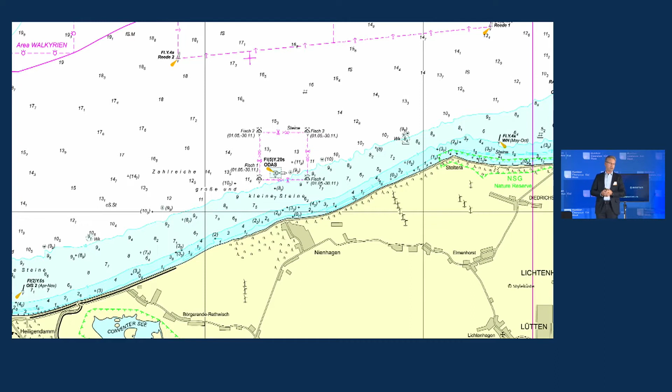And in the middle you'll see a small blue rectangle, where we have an artificial reef at the moment. And this artificial reef, this is not UXO, what you see here, all these things, this is concrete. These are concrete tetrapods and rings and a lot of things and natural stones. And within this area, a lot of research has been going on for about 20 years. And we have this in a cooperation with Fraunhofer, using this for some time now.

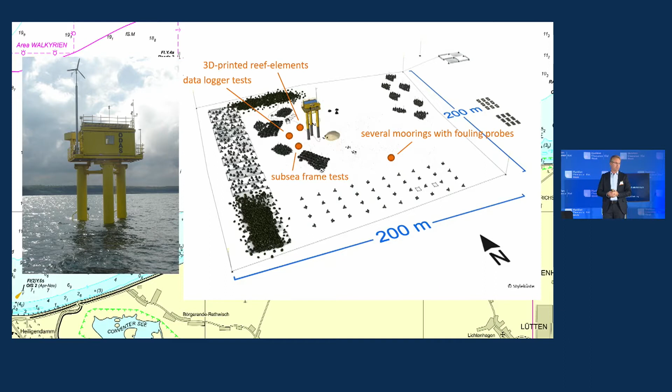And we also have some experiments running there about 3D printed reef elements, a data logger test, subsea frame tests, or several moorings for fouling probes and UV light aging tests. So there are already experiments running. And we also have communication and energy infrastructure. It's our platform, the yellow one on the left side, where you can come with your technology, your sensors or your probes and connect this to the platform. You can get all the data transferred to the land and also get energy from this platform. And so you have a lot of infrastructure for all the experiments you're planning to do.

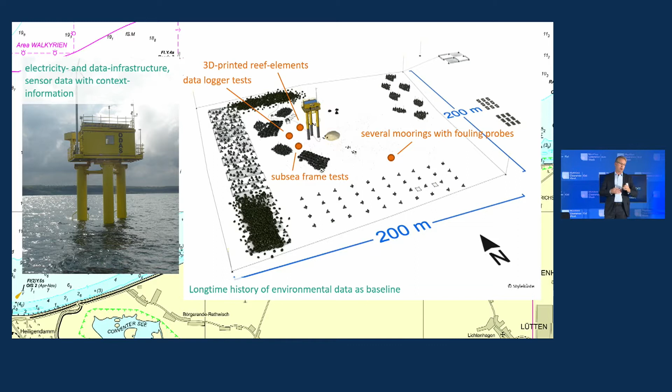And we have a very long time history of environmental data there. So for 20 years, this area has been monitored by biologists, and the seafloor and all the habitat is known. So if you're doing experiments there, we can support you with a long time series of information on this area.

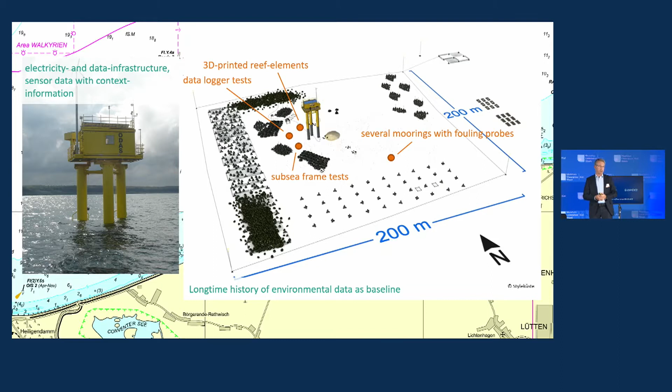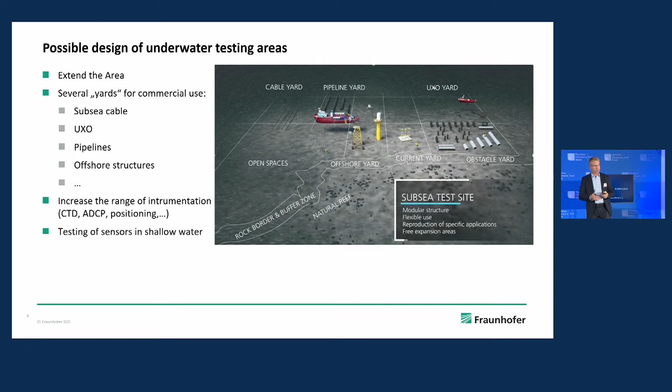And that's a running progress at the moment. We have a lot of funding for this. I say a lot means we have funding for this, and we now ask you to support us with your requirements. What do you like to have there in this yard?

We have a very good idea about what we are planning to do there, but within this context, Munition Clearance Week, we like to ask the industry, what do you need? What exactly do you need? So not a rough idea, UXO yard, but more exactly. So please come to me, tell me what you need, and we will build this there for you.

So the plan is to have the first usable UXO yard infrastructure in 2022, so it means next summer. It's very ambitious, but we have good partners, IKSR, who likes to start building this, but we need your support on what you really need.

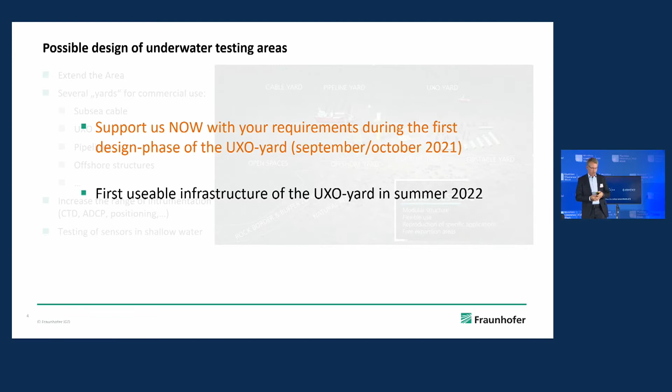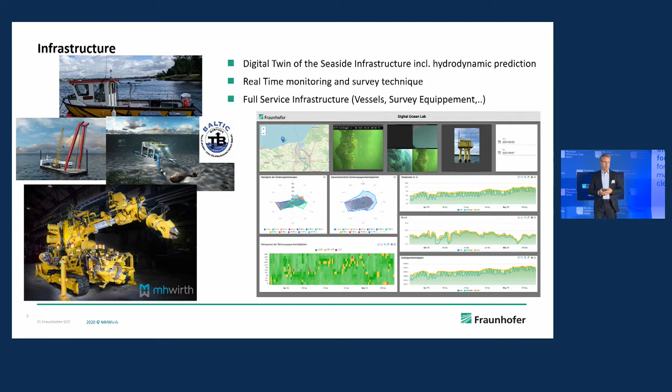It's a very interesting thing. Maybe Dieter Guldin will tell us about his experiences with a crawler. This is one technique that was developed for subsea mining once, but now we are thinking about using it for other purposes, maybe for UXO cleaning. This one is a really big one. It's about 16 tons at the moment, but this is just the model. The original one is bigger. And this is a really strong tool at the moment.

They have a lot of technique on it to scan the environment, to measure what happens with the object. You can change the chassis of this crawler. You can have different sensors on it. So we have an AI on it, so that you can control it and the object can really map its environment, and if there's an accident, it goes back. So it's an interesting tool. If you have questions, MH Wirth is willing to answer them. You can also ask me. I give you the contact, and it goes through us.

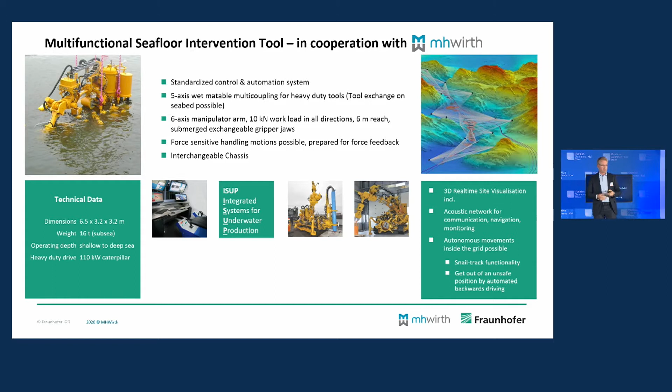So why Digital OceanLab? As we are an institute for computer graphics, the IGD is specialist in data analysis, artificial intelligence, and visualization of data. As you see on the right side above, if you have complex data from maybe a big dump site or from the sea ground, we have possibilities to visualize this. We have artificial intelligence to analyze the data, and this can help to improve the processes.

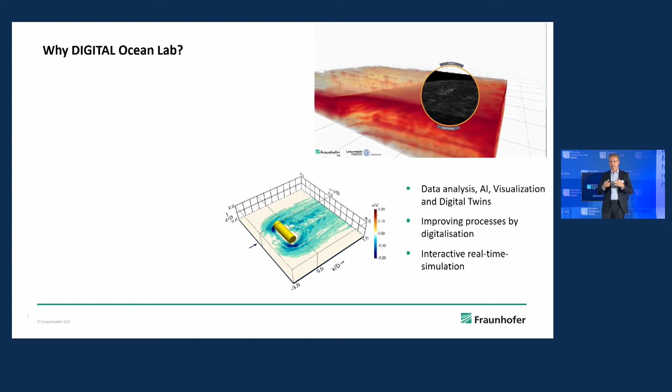And the other thing we are now planning to do, it's not existing yet, but will be the next thing in this development, will be a complete digital twin of the Digital OceanLab, including the fluid mechanic interaction, meaning a real-time interactive simulation of this environment. That's not coming today, not tomorrow, but that's for the next years.

And what already exists at the moment are some ideas for a dynamic room use. So we are using an AtoN system, it's an AIS, as you know from vessels. So you can mark the edges of our Digital OceanLab virtually via this AIS system. And as soon as we start construction, as we are doing in 2 weeks, we can change these buoys virtually without changing them physically. And when the construction is done, we just move it back.

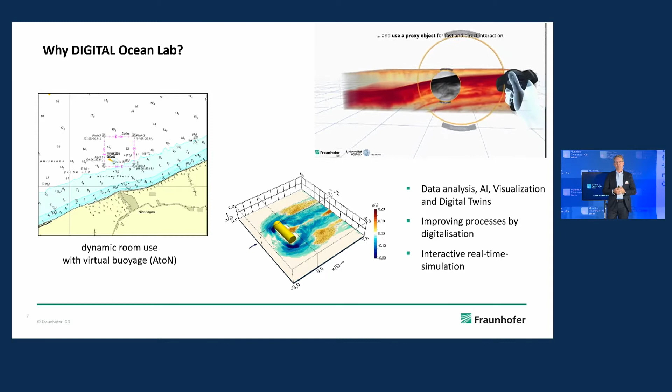That's not rocket science. But we are on a way with the authorities to make this possible, which also may be a good idea for further use of AUVs in a legal way. So that's just a first approach on this.

So I have a take-home message for you, because I have a lot of time, I was too fast. We are ready for action. So if you have any questions regarding tests, or if someone says, I do not know how to remove the UXO, we can test this here. No problem, just come to us, we can test it, we can do it. So there's no reason to wait. Contact us with your individual requirements. We're very happy to help you with our knowledge and the infrastructure.

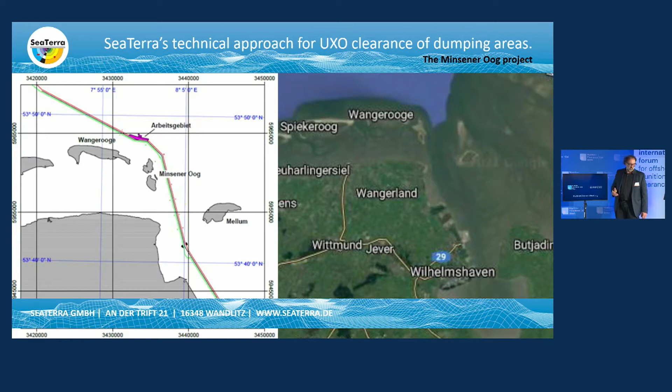But in this case it's slightly different, because there's the shipping route going out of Wilhelmshaven, and the shipping route has a curve - you see where it's marked Arbeitsgebiet. There's a slight curve, and the curve is actually too narrow. The problem is the big vessels from the JadeWeserPort need a wider curve to sail around there, and just in the curve there's a dumping area.

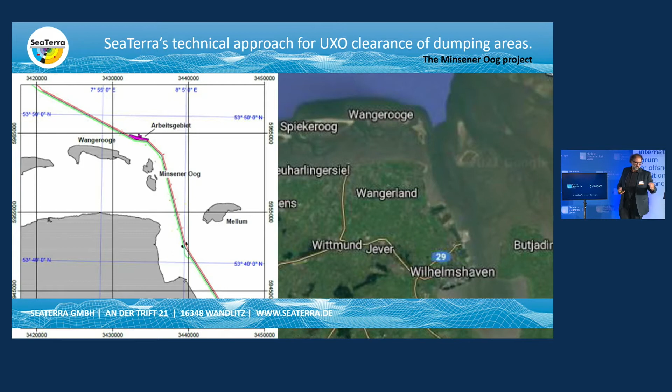It's a dumping area expected to have a lot of sea mines, ammunition, different types of mines. We are in front of Wilhelmshaven, in front of Wangerooge, and that's the area. Based on the magnetic data - and we also did an electromagnetic survey, it's not our data by the way, we already had that data, but we did another survey with a new electromagnetic system, and it corresponded quite well to each other. Based on this data set, we've been invited to come over for the clearance of 100 targets.

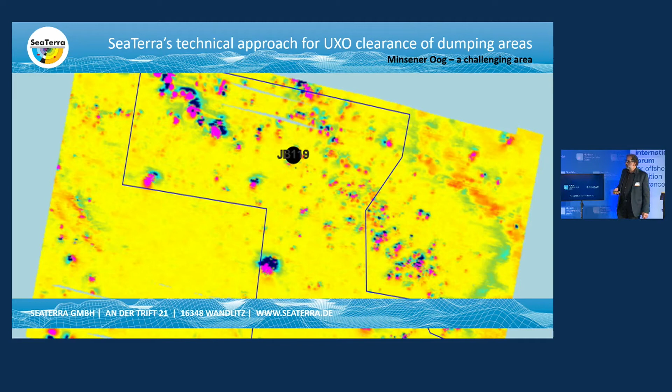Those who are familiar with Minsener Oog know it's a challenging area. What do we have? We have current, very high current, 1.5 meters per second. We have 2.5 to 3 meters per second sometimes on the surface, 2.5 knots on the seafloor. Those familiar with those numbers know this is really something. We have water depth of 15 to 25 meters, and we have the shipping lane just next to the working area, which means we cannot go on anchors - we have to have a stable platform or a DP2 vessel in place.

And since we decided to work with the crawler, to offer the project with the crawler, we decided to have a jack-up barge in place. So it's a very challenging area. I discussed it yesterday with Boskalis here - if the job hadn't been at that corner, let's say it had been in the Baltic area, it would have been quite more smooth going, easy going. The corner is really challenging. If you can do it there, hopefully you can do it everywhere.

Now, I'm not talking about the problems we had on the project. I'm not talking about tracks falling off the crawler. I'm not talking about the downtime, which raised a huge amount of costs, to be honest - because I want to sell you the good picture, the nice picture.

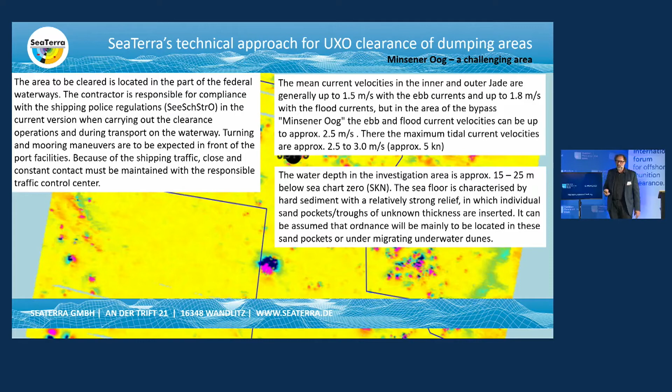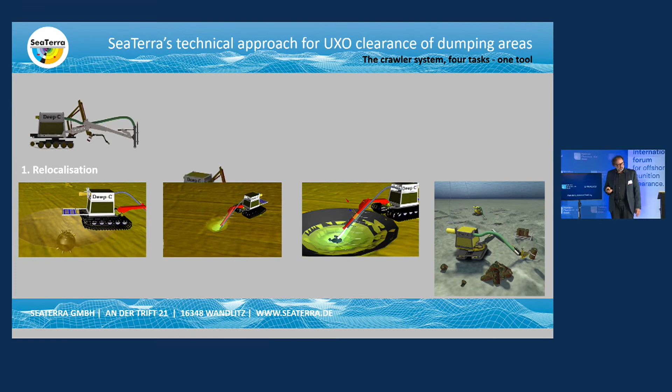Smart things - one machine, four different tasks. We have relocalization, dredging, identification, and clearance by means of picking up the UXO, placing it into a basket, lifting the basket up. All of those four steps are a kind of obligation in every clearance process - you cannot work around it. You have to do the relocalization, the dredging work, the identification, and the clearance.

And we've been focusing on identification very hard the last few months - attaching a magnetometer sensor, attaching side scan sonar, a Gemini, a Blueview, an ARIS system, ordinary cameras, all kinds of different things, to somehow get a picture of what we're coping with. Because if you don't know what you're coping with, if there isn't 100% clear identification, there's no chance to step further. There's a certain kind of clearance process that has to be kept.

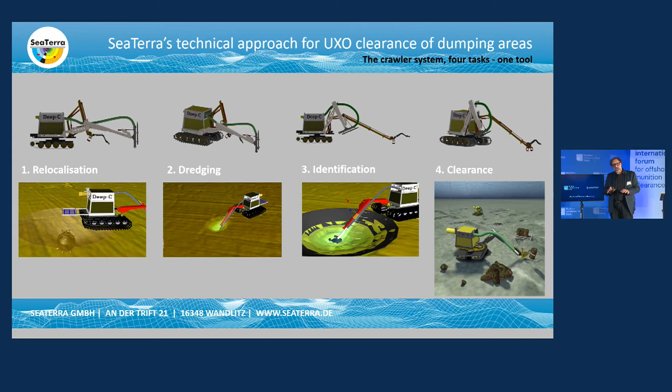And the identification, the decision making, if it's safe for transport on land, or do we have to blow it up, is based on clear and 100% identification.

So that's the machine. It's a cooperation between a Norwegian company and SeaTerra. It's called Deep-C. It's 15 tons on air. It has a lot of cables, a lot of pipes, a lot of valves. Yeah, and I can name them one by one because they broke down one by one.

And as you can see, it has 2 arms. Once we did our test, it was clear you cannot do it with 1 arm. We need 1 arm for survey, attaching the magnetic sensor on it, which is actually a gradiometer system with 3 different sensors, so you can have a smaller distance and a wider distance. And you work on all 3 axes, X, Y, Z. Yeah, so actually that was the idea.

And the front part was made from aluminium and Edelstahl just to get rid of most of the noise. And there was a lot of time spent on how sensitive the magnetic data is, because going back to the relocalization, you really need to find the target again. And so that's what we did. We put a sensor on it and it worked.

And we attached to the same arm the dredge pump and some cameras and the ARIS system, in order to be able to pinpoint the target, to work with the dredging pump around and to see where we are. And then we have the second arm, which needs to be capable to pick up 250, 400, 500 kilo objects, because we found mines with an anchor stone, which is quite complex to lift, but we've been able to manage.

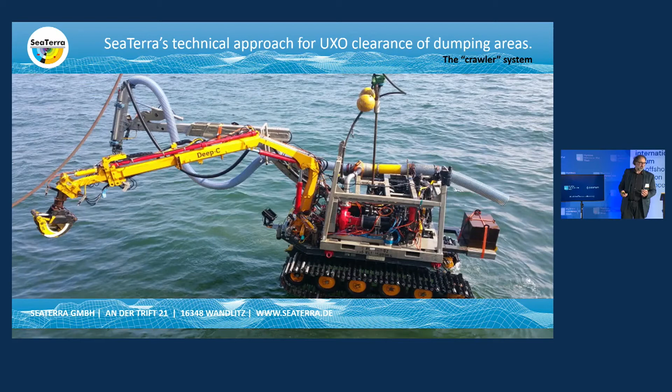So 15 tons on air, 2 arms, remotely controlled, 3 days work without launch and recovery, and this is a good one - I'm coming back to that - a stable working platform until 2.5 knots.

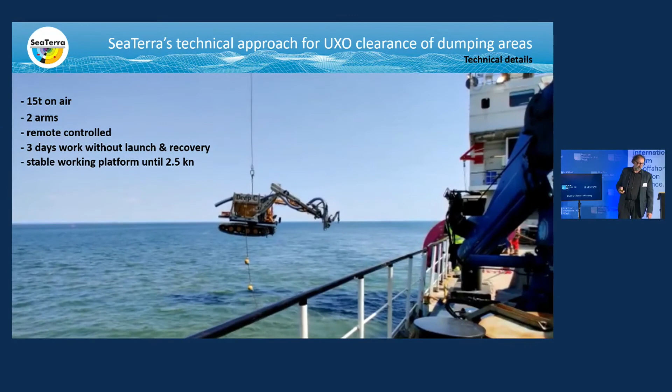What's the idea behind it? If I say 3 days working without recovery, most of you will think I'm working the whole week without launch and recovery. So what's about 3 days? Actually, the problem with the ROV is you haven't got a stable platform in the water. You need to launch and recover it. You have to wait for the tidal window to get a new approach. So if you do a hole with the ROV and the tide comes back, it's probably a lot of backfill in there, so you have to start the process again.

So what have we been looking for? We've been looking for a stable platform which can drive on the seafloor, probably for 2 or 3 days.

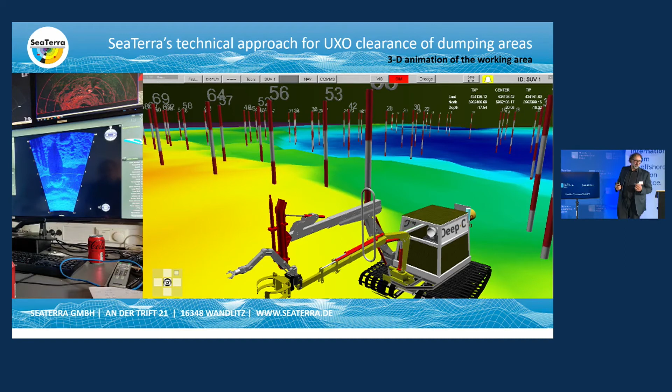So what you see over here is ARIS data. I mean, we did not invent ARIS, and everybody knows the ARIS system who's working on the seafloor, but it was amazing what I've seen there compared to the camera, to the picture, whatever. Let's see if that works. What you see on the right-hand side is actually this claw - it's the moving crane arm picking up a grenade - and what you see on the left-hand side is 2 mines already laying in the basket.

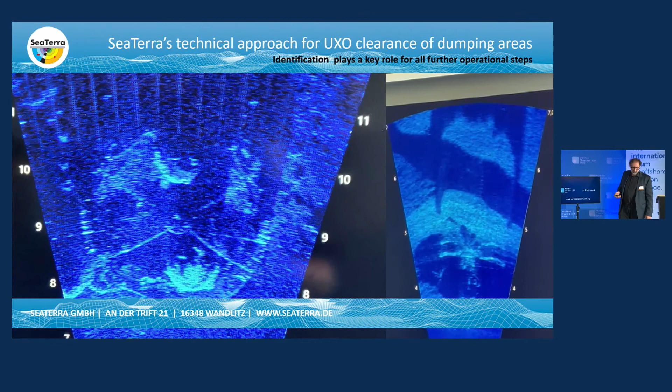So let that run for some seconds. You won't probably find out where the grenade or the target is. You will see the claw closing, but actually there's something different I want to show you, which is just coming, hopefully within a few seconds. It's actually the situation compared to this ARIS system on the camera.

And for our specialists, for our EODs, it's also very difficult to get used to that 3D thing, to find out where it is. But can you see the current and the kind of snow, so to say, in the water? Yeah, that's part of the reality there. Look at the speed. Look at the density. With just a normal camera, you couldn't do anything. So that was actually the idea behind having different kinds of visual sensors in place, in order to be able to identify and work. And that's actually the snowstorm we faced down there.

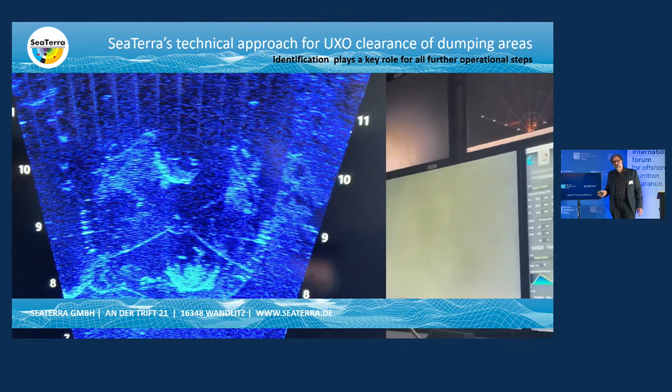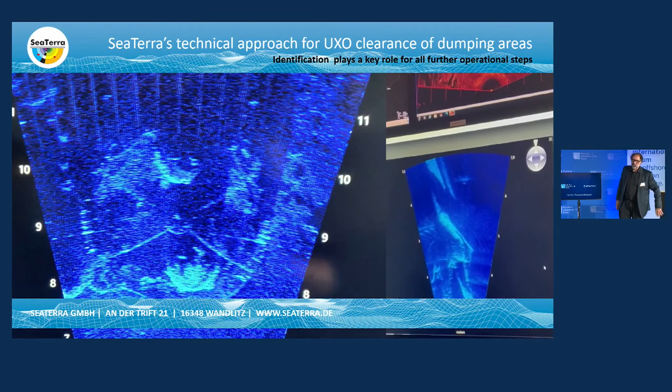But then we've learned also, and this is a very site-specific thing. Please keep in mind, everything is very site-specific about UXO clearance. No one job is just like the other. We learned with the water coming in to Wilhelmshaven, we had this snow thing going on. With the water, we had almost good visibility. With the water going out, we had all these sediments in the water. So once we weren't able to clearly identify a target, we simply left it in place and waited for the next tide. So water going out or water going in was actually a crucial point.

So what you look on here is two mines on the seafloor after picking them up by the crawler, putting them in the basket, and now lifting it up. So this is the basket with our net, and it was clear we have to deliver the full picture, we have to deliver the full service. So we pick up targets, we bring them up from the seafloor, we sail to the sandbank, or we sail to the harbor in order to hand over the ammunition to the authorities, to the Kampfmittelräumdienst.

And it was quite tricky. It was quite a task to invent something like those baskets, which are able to be filled up on the seafloor, lifted up to the surface, transported to the sandbank, opening the basket, and only the net and the mines remain on the sandbank. And we've ordered a special kind of net, which is quite expensive, to be honest. One net is about 480 euros because it's only Baumwolle and basalt, so it can be detonated and nothing is left.

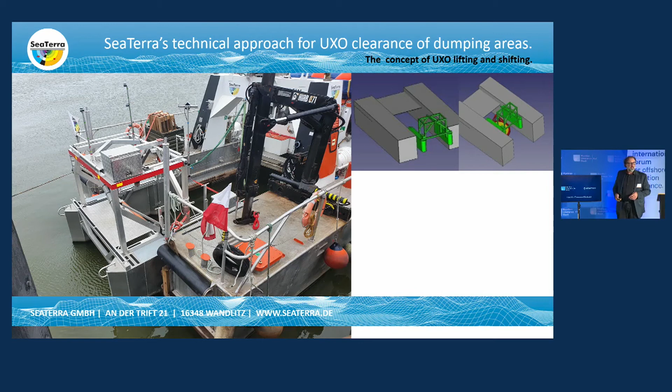What we used for that was a system, a catamaran in the catamaran system. So we bought a catamaran, and we produced a smaller catamaran, which is actually the smaller brother. The small catamaran has a winch, it has cameras, different kinds of sensors, and a remote control. And the bigger catamaran also has a winch and cameras, so the full set. So what we do is we have the small catamaran in the big one, and we have the basket attached to the small catamaran.

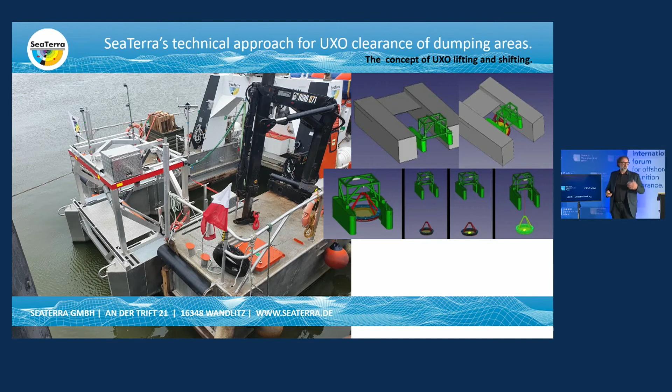And we are able to lower the basket to the seafloor, and we are able to pick up the basket again as soon as it is filled. We can leave it on the seafloor for a week. I suppose it's probably not that much of a good idea. You become quite nervous after a while. Is everything still in place, yes or no? So this is the main basket system we've been working with, but we had also other baskets, just ordinary subsea baskets, which also fit into the system, where we delivered the ammunition which is safe for transport, handing it over to the KBD.

So this is a picture from the bigger catamaran to the smaller catamaran, because once we had something in the basket which was not safe for transport and handing over to the KBD, we had to bring it to the sandbank. So we lifted it up in the smaller platform and we towed it behind the bigger catamaran to the sandbank, doing a curve. And as soon as the smaller catamaran, which also has a GPS system in place, lowers the basket down, the net will just be lowered to the sandbank and we lift the basket up. Everything is free and you go.

It sounds easy. I've spent weeks to find a simple mechanical solution. I don't want to have hydraulics. I don't want to have electronics. I don't want to have anything which can go wrong. I just want to have simple mechanical solutions to solve this problem. So what have we done in the end?

We've surveyed, we cleared 8.8, 10.5, 12.8, Kampfmittelschrott, Artilleriegranaten, Minen. So we had in the end 28 flak, 8 mines, 1 EMC mine with Ankerstuhl, which was quite challenging, Metallrahmen and Grundgewicht. And if you remember my presentation yesterday, where I asked, are we actually doing UXO clearance, or do we do scrap removal? This is actually what I'm talking about. Actually, 69% of the targets we've cleared over there is UXO. So this makes the difference if you work outside a dumping area or inside the dumping area.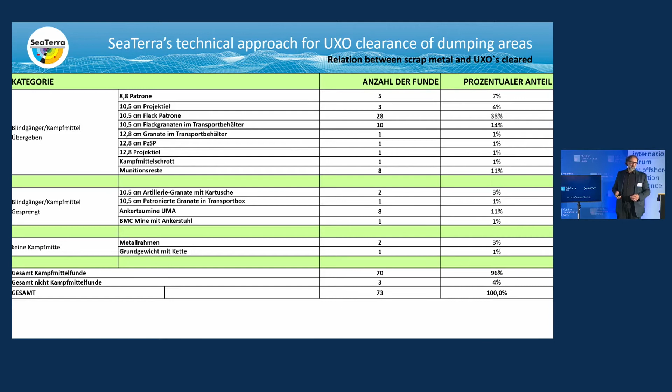So actually, this is a basket which has been delivered to the KBD on board of the bigger catamaran, because these kind of UXOs can be handed over to the KBD. They are safe for transport. So keep in mind, not everything on a dumping area is actually meant to be blown up, or just put into the oven.

By the way, has everybody spent a thought on whether we can use UXO as a kind of energy source? Put it in the oven, not just burning it and investing energy, but getting energy out. You say yes, very good.

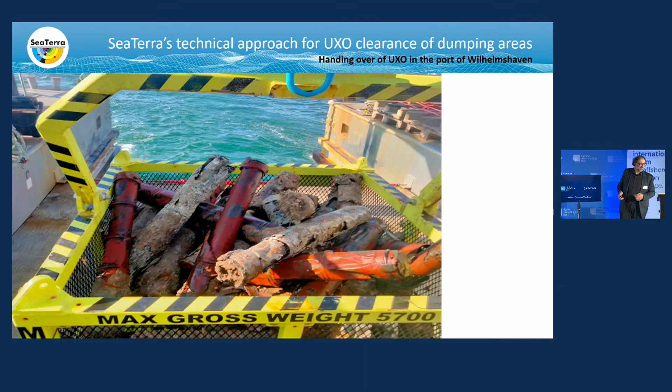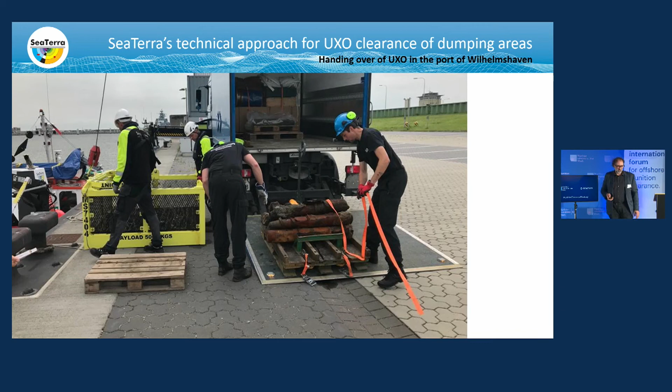And I know there are now some questions in regards to TKMS. The colleague before said, okay, SeaTerra has a different idea. It's not about a different idea. It's simply a different aspect, because you have to be clear that the platform is not a solution to the clearance. It's a solution to getting rid of the stuff at the end of the process. The process of UXO clearance is still something which has to be highlighted. So if somebody is happy to spend some money for us, we'll go build 3 new crawlers based on our experience over here. So I'm happy for people coming up later.

But to be honest, it's true, the amount of UXO we're talking about needs a solution. I personally would advise to have a kind of alternative in mind: starting with a smaller project, getting rid of UXO, starting as soon as possible, bringing it on land and to the KBD, and in parallel build up the platform we've heard about so often. But get experience. Get the companies involved to do the clearance and start right now, in order to get experience.